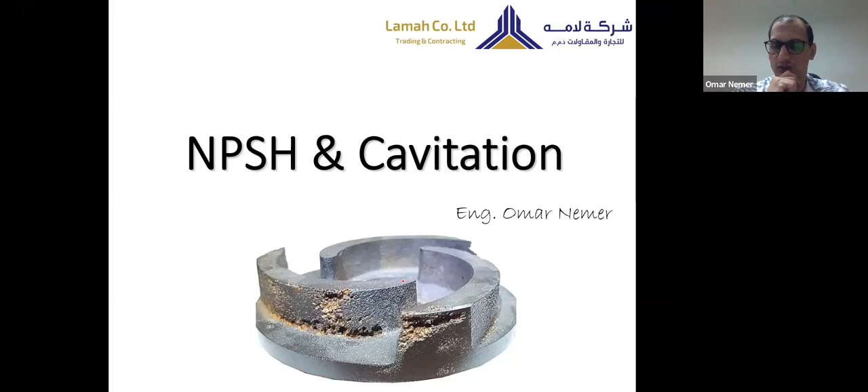Now, like some movies, sometimes, you know, some movies show you a short scene about the end, then they come to the beginning of the story. This is what I will do today.

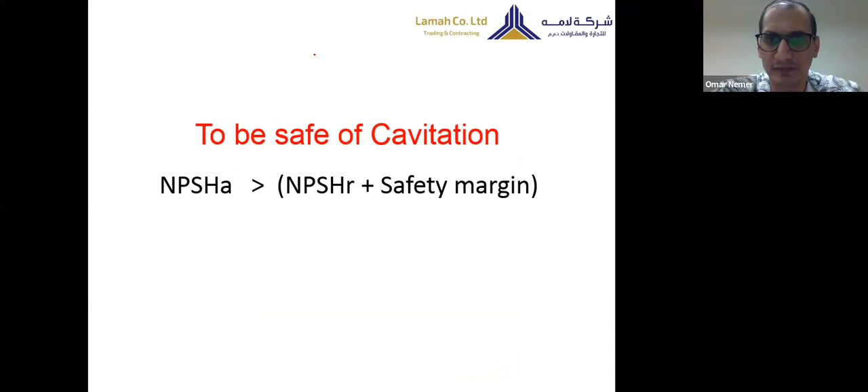Now, the end - we want to reach this conclusion. What is the conclusion? To be safe of cavitation, you need to satisfy this condition: NPSHA, something called NPSHA, has to be bigger than NPSHR with safety margin.

Now, what is cavitation? What is NPSHA? What is NPSHR? What is the safety margin we are looking for? These are 4 questions we will answer. But I'm just telling you the end of the story.

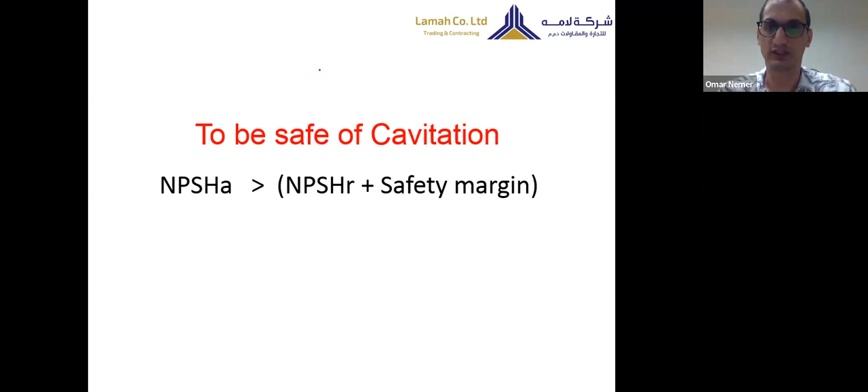Remember, to be safe, to avoid cavitation, to be aware of the risk of cavitation, you need to make sure that the NPSHA in your system is bigger than the NPSHR with safety margin. Okay? So this is what we will end up with. Now, let us go to the beginning of the story.

First, there are 2 things we need to clarify. There is something we call the absolute pressure, and there is another thing which we call the vapor pressure. Why did we select these 2 things specifically to remind ourselves about? Because they are related directly to a suction pump and to the issue of NPSH and cavitation.

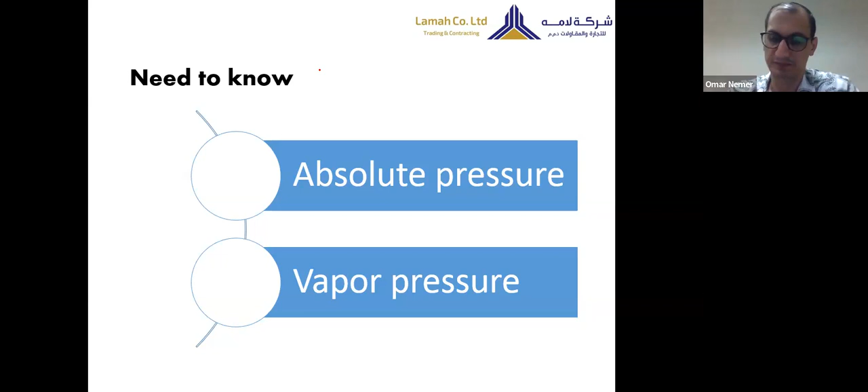Now, absolute pressure. Guys, now you know, when you have a pipeline, and in this pipeline you can have some gauges to read the pressure. This pressure reading, which you can see in your gauge, this is what we call gauge pressure. Gauge pressure, it's the pressure level that is shown on the gauge.

This pressure shows the pressure of the water inside the pump, inside the pipe, excluding the atmospheric pressure - which means the atmospheric pressure is actually not included. It's not shown in the gauge.

So, for example, if you have a tank and there is a pipe, and you have a water level here, up, let us say 10 meters of water. If you put your gauge here, you will notice the gauge shows 1 bar. Why 1 bar pressure? Because the column of water, 10 meters of water, will generate a pressure of 1 bar. So your gauge will show, will give you an indication of 1 bar.

Okay. Now there is a question here. Once we say 1 bar equals to 10 meter head of H2O, how did we know that? How do we come to this?

Simply, you can make a small experiment. If you brought a pipe, closed from one of the endings, let's assume this pipe has a length of 12 meters, and fill it with water. Then bring a plate or whatever and fill it with water. Then flip this pipe and put it inside. What will happen?

You can see the water will go down. Why? By gravity, right? By gravity. The water will fall down, it will fall down up to a certain limit, then the water will stop. Why? Because when the water falls down, it falls down till we reach a pressure of 0, which means we have a vacuum here. At the same time, we know there is atmospheric pressure pushing on the surface of the water.

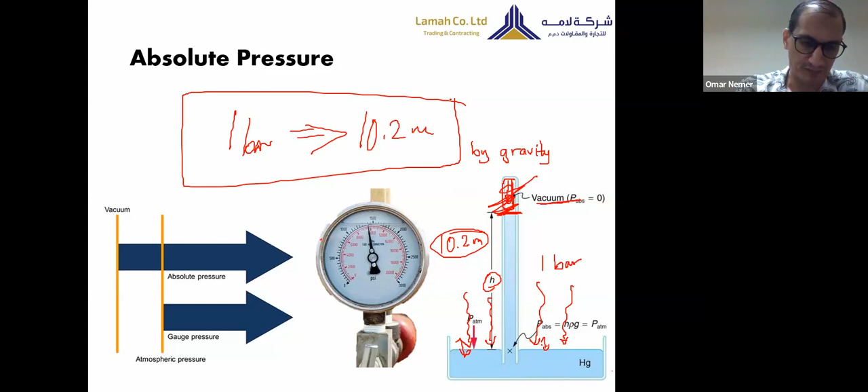So now, as a final conclusion, we have something called absolute pressure. Absolute pressure is the gauge pressure, the reading of the pressure which you can see in the gauge, plus the atmospheric pressure.

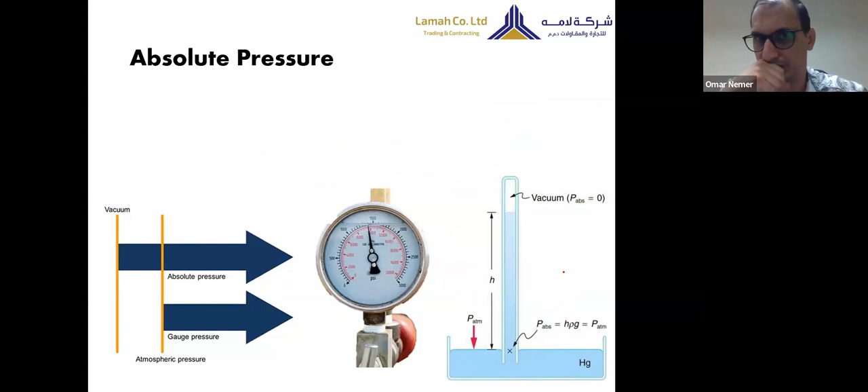Now, let us go to the second term, which is the vapor pressure. Now, vapor pressure has a nice story. Let's start this story to define the temperature, or once we say I have hot water, what does the heat mean?

Now, if you look here in this side, I can see it's just like a sample. Let us assume these circles are the molecules of water, H2O molecules. Because water is a liquid, we know these molecules have some bonds between them. They are not strong enough to make this water solid. At the same time, they are not weak enough for the water to become a vapor. It's in moderate strength. But at the end, there is a link, a bond, ties between these molecules.

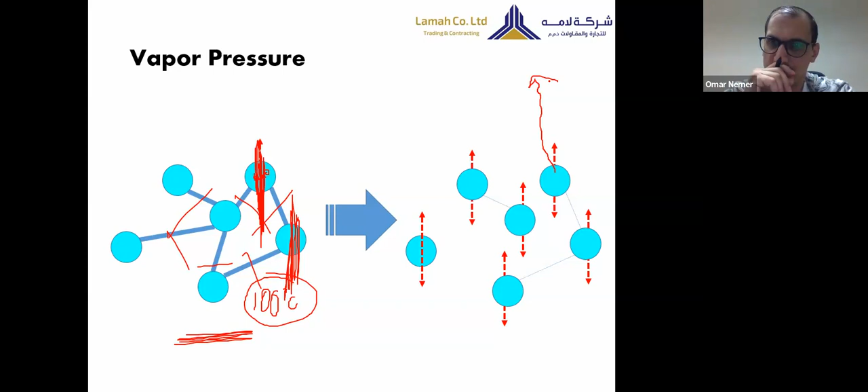Now, let us make another experiment also related to that.

If you have a glass of water, like here, and it's open to the environment, if you come back the next day, maybe you will find no water there. But nobody has drunk it, it was evaporated. And nobody heated it, nobody put a flame to heat the water to be evaporated.

Actually, this heat comes from the surroundings of the glass. The few molecules which can take energy from the surroundings will break their bonds and go to the atmosphere. One by one, most of these molecules from the surface take energy from the environment and disappear. They evaporate. Slowly, after 2 or 3 days, all these molecules will go to the environment.

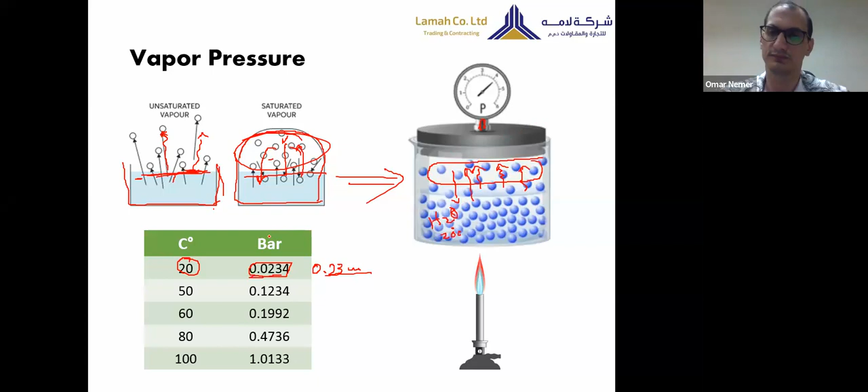Now we brought some flame here and started to heat. We heated, gave heat to the water, heated more, the temperature kept increasing till we reached 50 Celsius. Once we reached 50 Celsius, we maintained this temperature.

After a while, when we look again at the pressure gauge, we see the pressure is fixed at a higher amount. It shows the pressure is 0.1234 bar, which is 1.23 meter head. So the pressure increases. Why? Because we heated the water, so more molecules become evaporated, making higher pressure in this area.

Now we will again increase the flame. We want to heat the water till it reaches 60 Celsius. After a while of fixing this temperature, you will see the pressure becomes 0.19, which is 1.99 meter head.

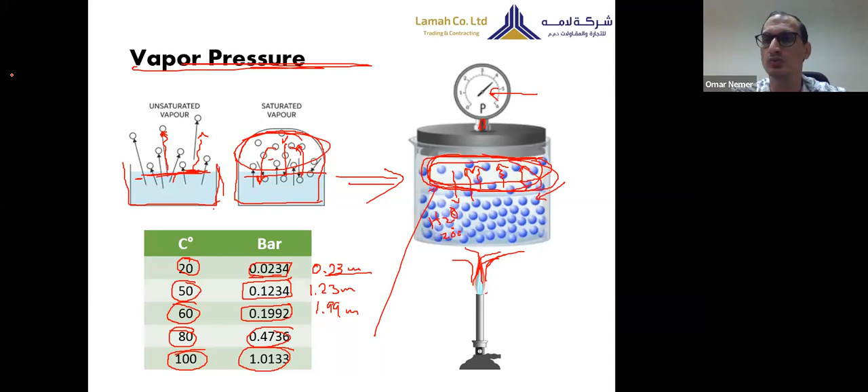Now, the vapor pressure is actually a specific aspect for each liquid. Each liquid has a different vapor pressure, which means if I brought oil and heated it till 60 Celsius, that doesn't mean the pressure will also be like water's 0.19 bar. It will give you something different because this varies from type to type of liquids. But this is what we call the vapor pressure.

Now, we want to understand more about vapor pressure and how we can boil liquids. How can we evaporate liquids? Now, maybe someone will tell me the water boils once the temperature of the water becomes 100 Celsius.

We all know that if we heat the water till it reaches 100 Celsius, it will start to boil and molecules will evaporate. But actually, this is not the root of the case. The root is, gentlemen, the liquid will boil and evaporate once the vapor pressure of the liquid reaches the same level as the pressure on the surface of that liquid.

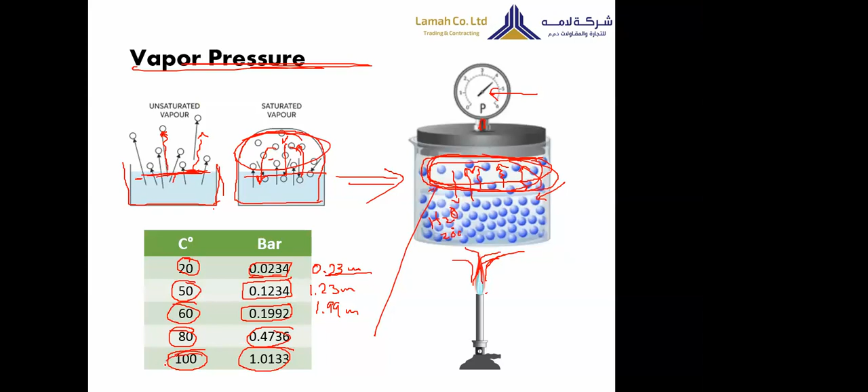For example, once the vapor pressure of the water equals the atmospheric pressure on the surface, then the boil will happen, regardless of the temperature. This is why, when we said if you heat the water till it reaches 100 Celsius, the vapor pressure will be 1 bar - this 1 bar equals 1 bar of the atmospheric pressure. So boiling actually happens when the atmospheric pressure, or the total pressure on top of the surface of the water, equals the vapor pressure of that liquid. In this moment, the boiling and evaporation will happen.

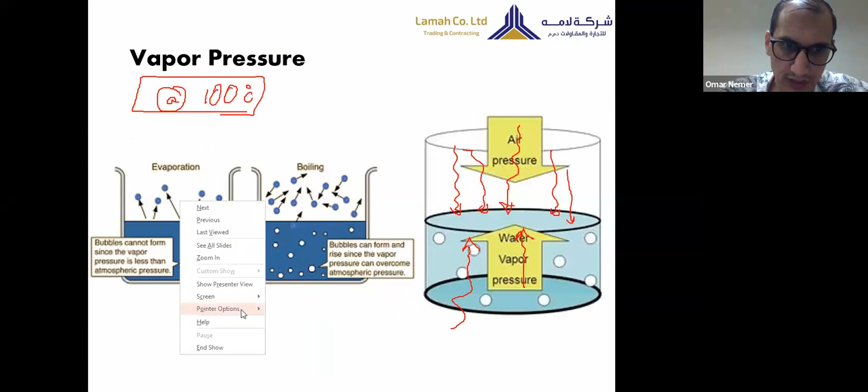Now, somebody will tell me, if this is correct, that means we can evaporate the water under 20 Celsius. And this assumption is correct. How? Let us say if I brought a glass of water and the water is 20 Celsius.

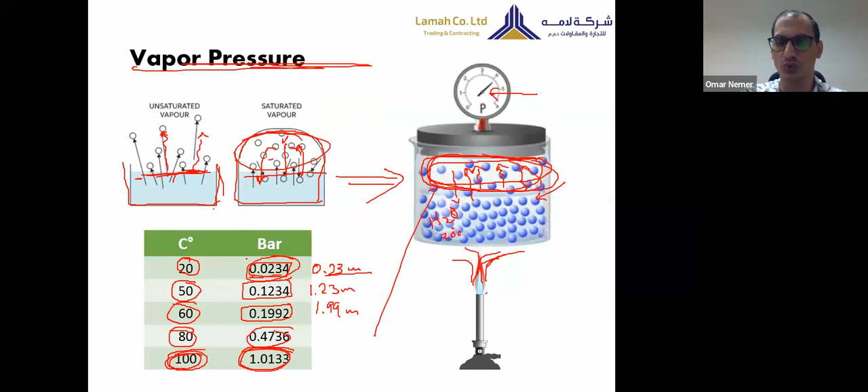It's cold, right? Now, if we closed the surroundings and air is inside, then I will bring some vacuum pump and start to evacuate the air inside. The pressure on top of the water will start to decrease because I'm removing the air. Once the pressure of the air inside that place reaches 0.023 bar, you will see the water is actually boiling and evaporating, even though the water is 20 Celsius.

Why? Because that means you can boil the water in two ways. One way is to heat the water to increase the vapor pressure till it becomes the same level as the pressure at the surface, which is the atmospheric pressure, for example if it's open to the area. And the second way, instead of heating the water, we decrease the pressure on the surface till it reaches the level of vapor pressure. In both ways, you can evaporate the water. If you evaporate the water by adding heat, we call it hot evaporation. But if you evaporate it without temperature, this is what we call cold evaporation.

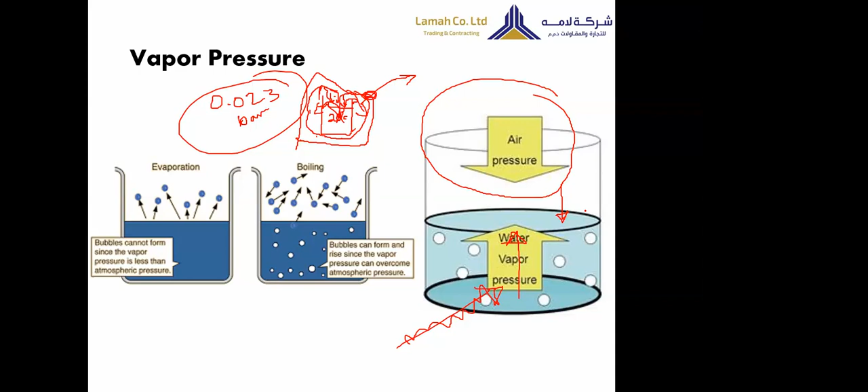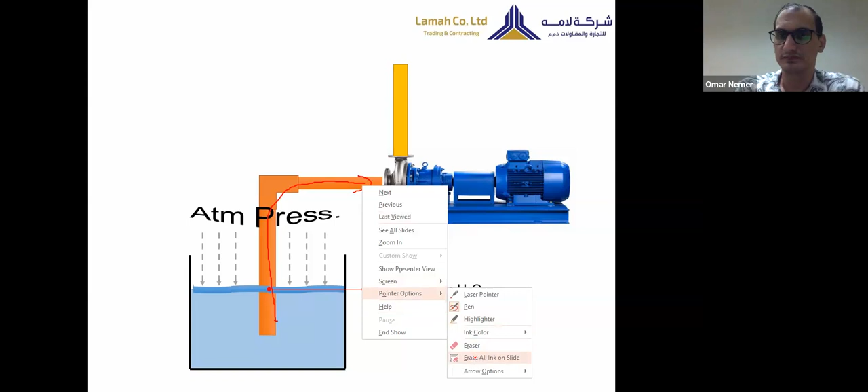Simply, the water - it doesn't have the potential to bring itself from down to top. But who pushes the water to flow from down to top - there has to be some force, and that force comes from the atmospheric pressure.

How? First, to start a pump and let the pump suck water, before operating the pump you have to make something called priming. How we can make priming? First, you have to put a non-return valve or foot valve here. Second, you have to fill the suction line with water. Even the pump itself has to be filled with water.

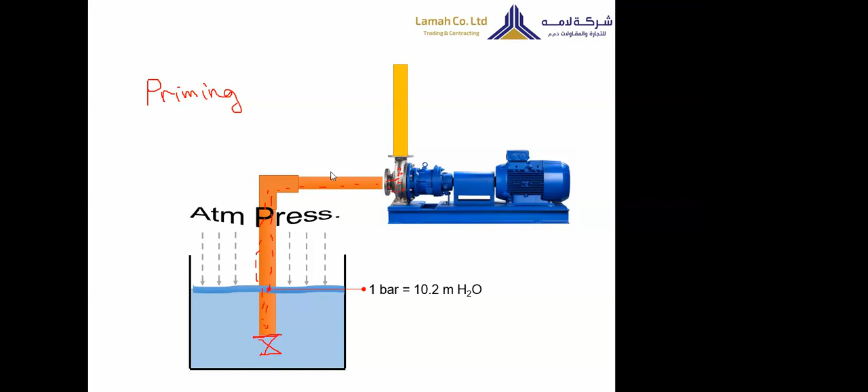If you made this, then we can say you made priming for the pump. So priming is putting this non-return valve, filling water in the suction pipe and the pump itself. This is the priming process. Once you finish the priming process, then you are ready to start up the pump and start pumping.

Now the mechanism - once you start up the pump and it starts to rotate suddenly, very quickly, the impeller rotates quickly. The impeller will push the water inside the pump. It will kick it suddenly to the discharge line.

In this moment, there is an instantaneous vacuum that will happen. There will be no vacuum exactly clear, but instantaneous vacuum will happen inside the pump. So the pressure inside the pump becomes zero instantaneously. This is inside the pump.

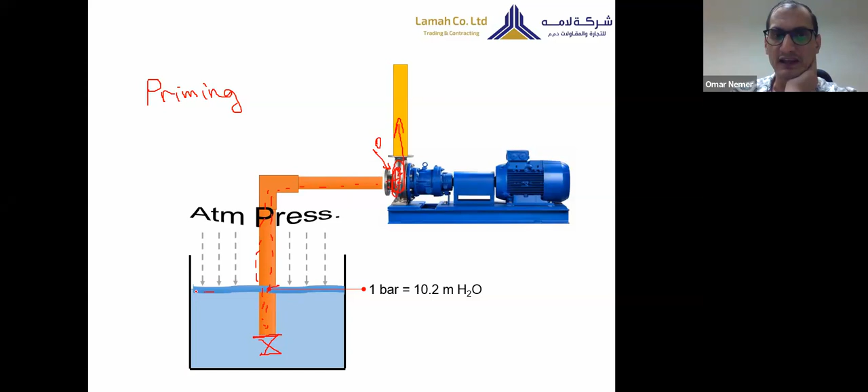But for the water here, at the surface of the water in the tank, we have atmospheric pressure. This atmospheric pressure equals 1 bar, which is 10.2 meter head. So for the water here, there is absolute pressure. Why do we say absolute? Because we included the atmospheric pressure. So the absolute pressure here is 10.2 meter, right?

But inside the pump, the absolute pressure instantaneously is zero. So we have delta P, a differential pressure. We have 10 meter head here from the atmospheric pressure, and zero inside the pump, so we have delta P. This delta P is the force which makes the water continue flowing from down to the top to reach the pump.

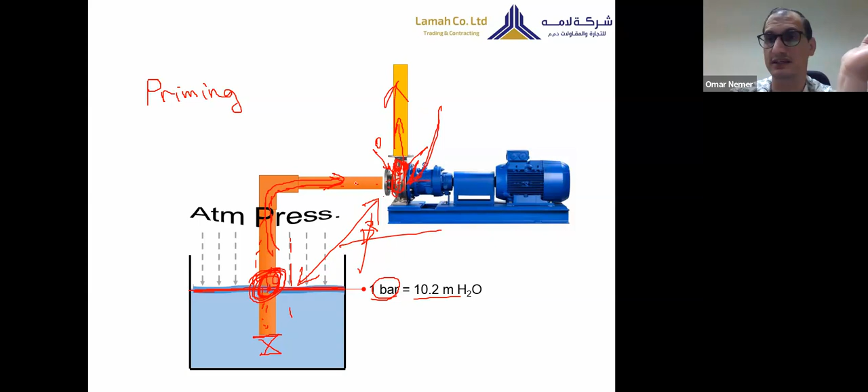So now, gentlemen, if you made some opening in the casing, immediately you will see the pump stop pumping. It will work, but there is no water coming inside. Why? Because atmospheric pressure will come in here, so this delta P will disappear. There is 10 meter head here and 10 meter head there, so we have no differential, so the pump will stop sucking. So this is how the pump makes suction of water, especially from down to top.

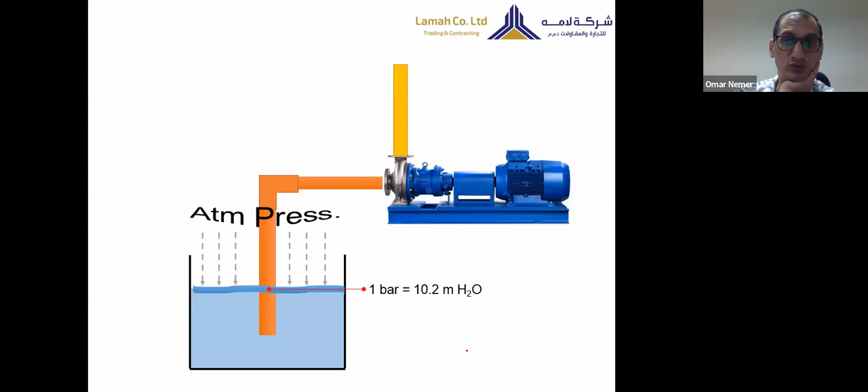Now, these three things which we said, absolute pressure, vapor pressure, and how the pump is sucking water from down to top, if we understand these, we can mix them in our minds and conclude many things to understand better and to know what is the NPSH. For this process, please follow with me answering a couple of questions.

Question number one. As you can see here, we have an example of a pump which will suck water from down below. This example says the elevation between the water surface and the pump level is 3 meters. Also, assume that the friction or head loss caused by friction inside the suction line is equal to 1.2 meter head.

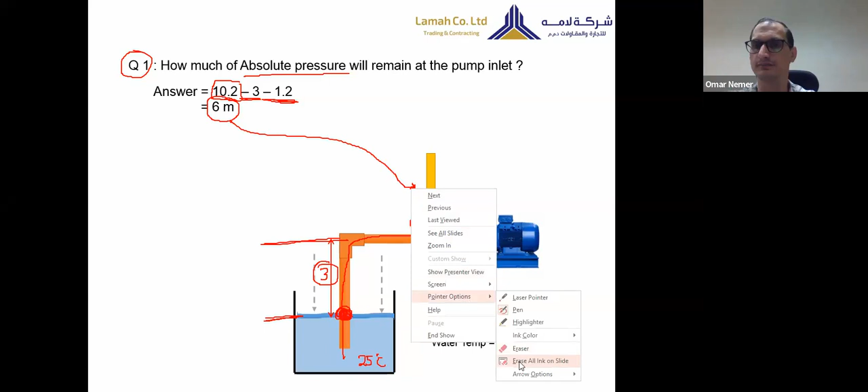Now, question number two.

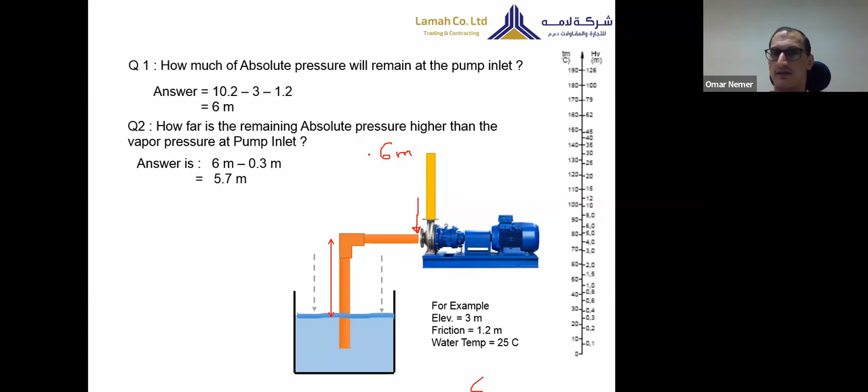Question number 2: how far is the remaining absolute pressure higher than the vapor pressure at the pump inlet? From question number 1, we knew the absolute pressure at the pump inlet is 6 meters. Now we want to know the difference between the remaining absolute pressure at the pump inlet and the vapor pressure level. Why do we care about this difference?

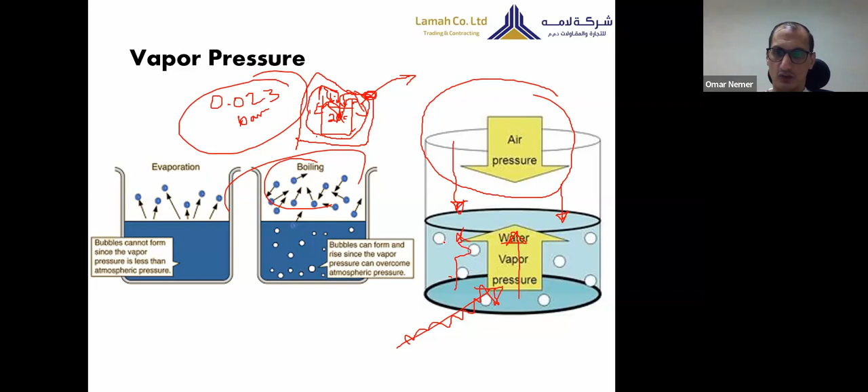Remember when we discussed boiling and evaporation? We said evaporation and boiling, generating bubbles, will happen if the pressure on the water surface equals the vapor pressure. We are afraid of this scenario, when the absolute pressure on the water equals the vapor pressure, because the water will start to boil and create bubbles. We don't want this. If it happens, it's related to a problem called cavitation, which we will describe after a while.

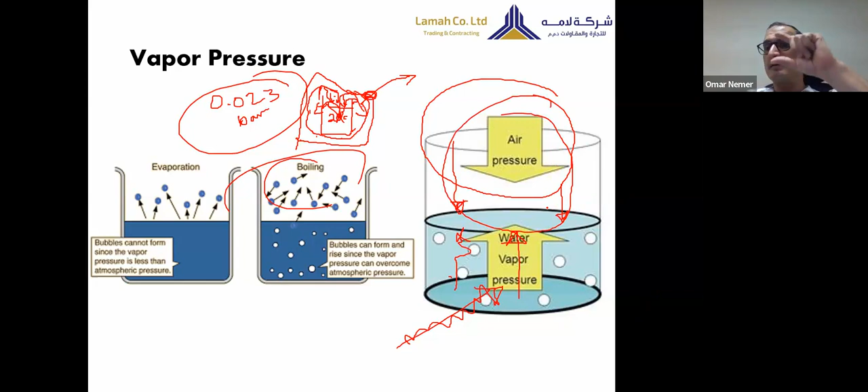So we don't want this to happen. We want to make sure the pressure above the water surface is always higher than the vapor pressure by some extent. This is why I'm asking question number 2. We want to know this remaining absolute pressure at the pump inlet, and how much higher it is than the vapor pressure, because I need this pressure to be higher than vapor pressure. But how much higher does it have to be? This is what I'm asking you.

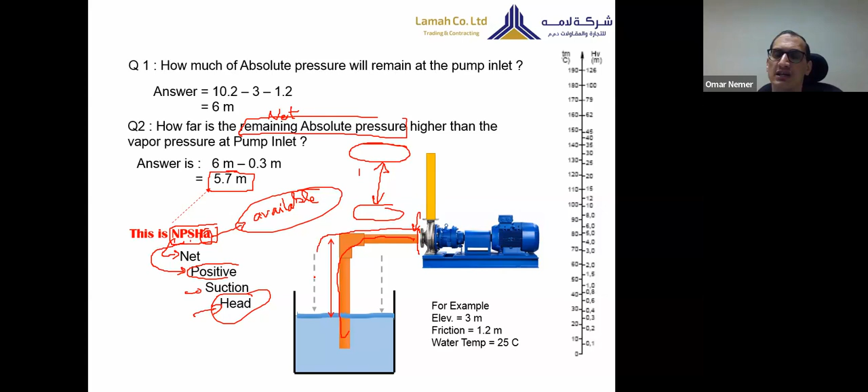This small A comes from the word available. Why? Because as you can see, this NPSH which we calculated is actually related to the suction line, not to the pump. This is something which is available in front of the pump. The pump didn't make it, it's available for the pump, but the pump didn't create it. This is the NPSHA: the net positive suction head that is available in the system for the pump.

And this NPSHA has to be calculated, using this equation. Actually, this equation is the conclusion of the previous questions we made. Remember question number 1, we asked about the remaining absolute pressure at pump inlet. Then we asked how far it is from the vapor pressure. If we combine these two questions, question number 1 and number 2, we get one equation, which is here.

NPSHA equals the atmospheric pressure, which is 10.2 meters, plus other head sources. Sometimes there could be other head sources. In this example, or in any place where we suck from down to top, when I have suction lift, here I have no other sources of head, usually it's only the atmospheric pressure. But suppose if I put here a submersible pump, and I wanted to calculate the NPSHA for the pump on top.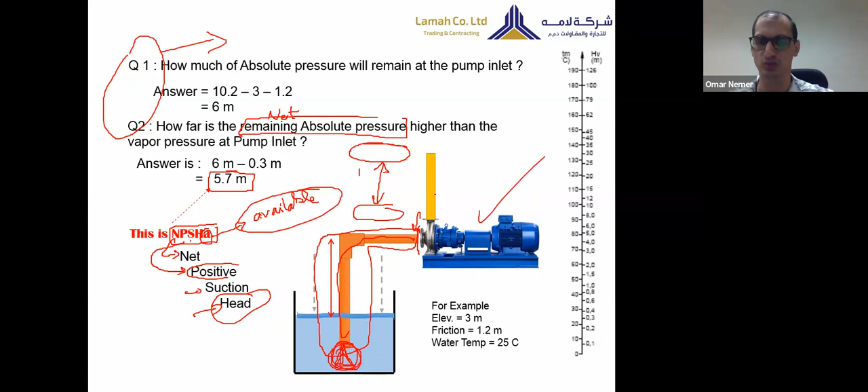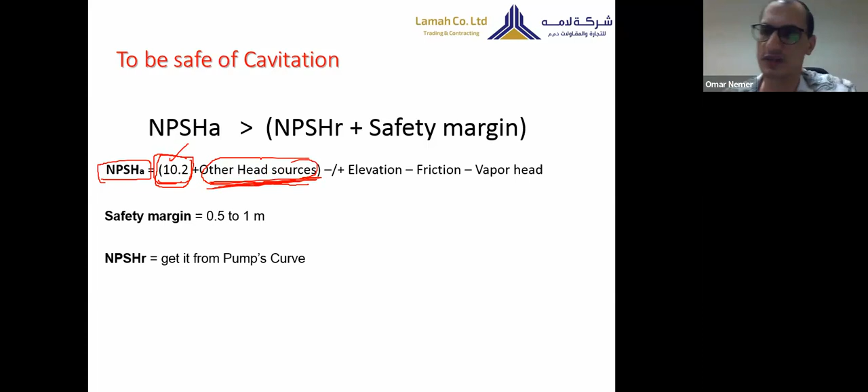In this way, I have to say I have 10.2 meter head atmospheric plus the head which is generated by the submersible pump. This is what I mean by other head sources. Any head source has to be added to the atmospheric pressure. So again, back to this equation: NPSHA is the atmospheric pressure plus other head sources.

Minus the elevation if it's negative suction. If you have negative suction, then you have to subtract the elevation. But if you have positive suction, then you have to add the elevation.

Negative suction, guys, if I have tank and pump on the top, this is negative suction. The elevation, it's here. So in such case, I will deduct the amount of the elevation from the atmospheric pressure.

But if I have positive suction like this, as you can see, the pump is next to the tank. In this situation, this elevation, which is the water level, because the water level is higher than the pump, this elevation will be added to the atmospheric pressure.

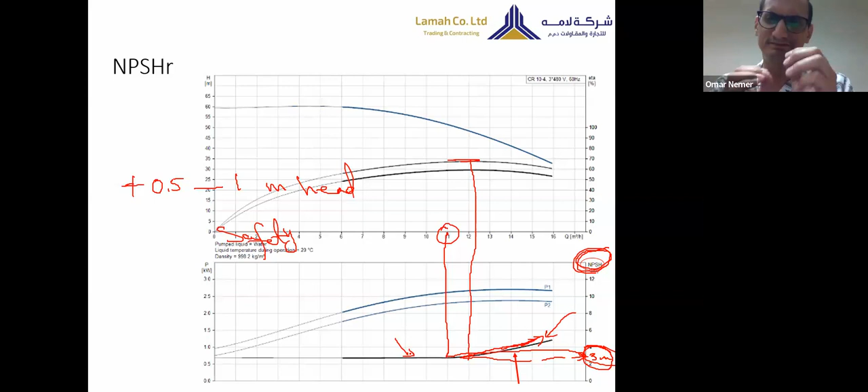Now, all pump manufacturers are telling us, all of them agree, that this value of the NPSH which you get from the catalog, please add half to up to 1 meter head as a safety margin. Why? Because this curve is general in the catalog. The manufacturer is producing thousands and thousands of models, thousands of quantities of the same model. It's impossible they all have the same curve, because at the end during production there is some very minor differences, difference in roughness, you know, they cannot be 100% the same.

Also, the instruments that we are using have some, you know, accuracy level. This is why they are telling us, please, the NPSHR which we will get from our curves, put 0.5 to up to 1 meter head as a safety margin.

So now you know the NPSHR, how to find it, and this safety margin, which we said 0.5 to 1 meter head as a safety margin. So now you know NPSHA, and NPSHR with a safety margin. So I can tell you, if your NPSHA is higher than NPSHR including the safety margin, then you are safe. You are away from the risk of cavitation. So now you know what is the NPSHA, what is the NPSHR.

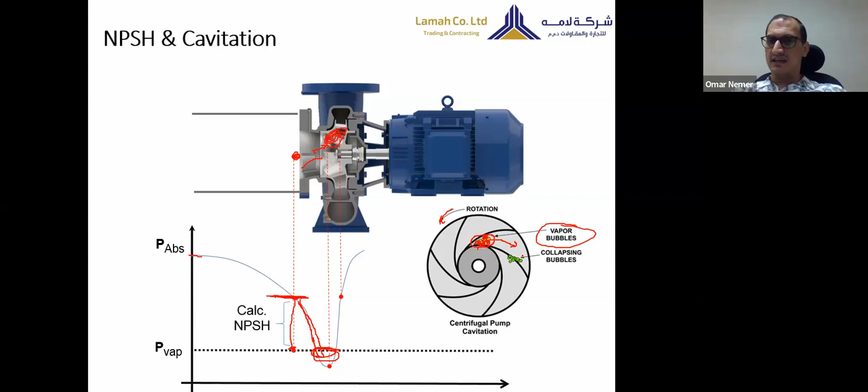These vapor bubbles will be generated here. But these bubbles will not stay in the same place because the impeller is rotating, so by centrifugal force this bubble will continue moving. But once it reaches this place, the pressure of the water will start to increase by the effect of the impeller. So once the pressure increases again, this vapor bubble will disappear suddenly.

Why will they disappear? Again, these vapor bubbles are not air, they are vapor bubbles formed because the absolute pressure comes down to the level of the vapor pressure. But once the pressure on the water goes back to a higher level, the source of presence for these bubbles is gone. These bubbles will disappear, once they disappear they will leave

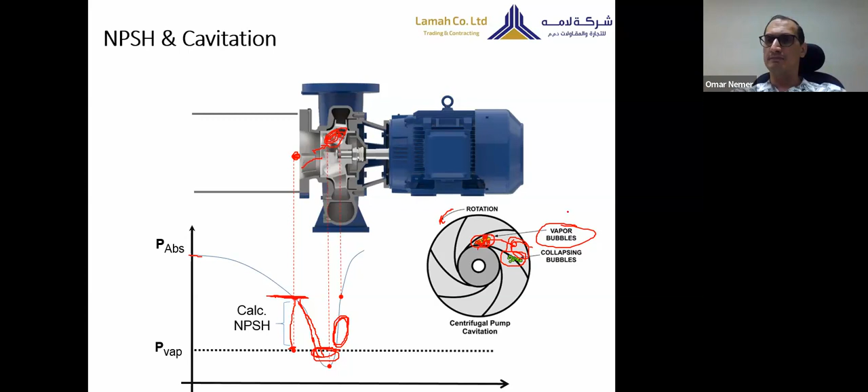vacuum bubbles. They disappear and the vacuum will be in their place. But this vacuum will disappear immediately. But how? This is the problem. This is the vapor bubble, as you can see, this is the vapor bubble. This vapor bubble is surrounded by water.

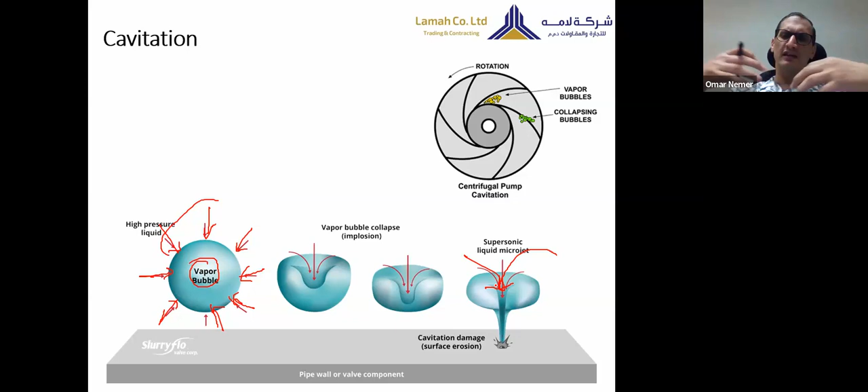But once the absolute pressure of this water goes back high, as we said, this bubble will disappear. But how will it disappear? It will collapse, quickly collapse. So the surrounding water will go inside this bubble to occupy the gap left by this vapor bubble. The water will flow quickly, very fast, to fill this gap. The speed of this water which wants to fill this gap equals the speed of sound in water. The speed of sound.

This is just to imagine how fast it is. It's very fast. And once it goes to fill this gap very fast, this water will hit to each other. You know, it's like this. The water will come from all directions and will meet in the middle. They will hit.

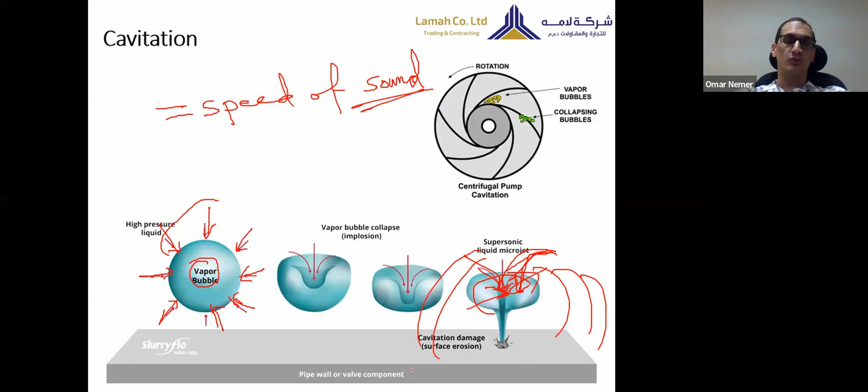This hitting of the water, which is at the speed of sound, will generate two things. They will generate a wave of pressure, a very tough wave of pressure, and this wave will be reflected to other parts of the pump, plus they will generate a jet of water flowing so fast, at the speed of sound, and they will hit the surface of the impeller here.

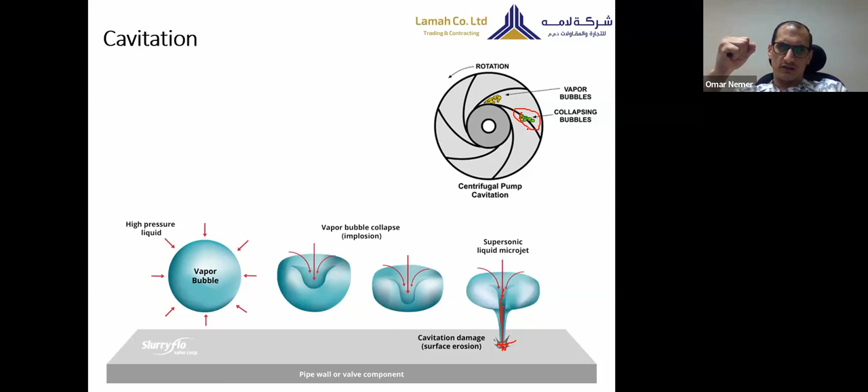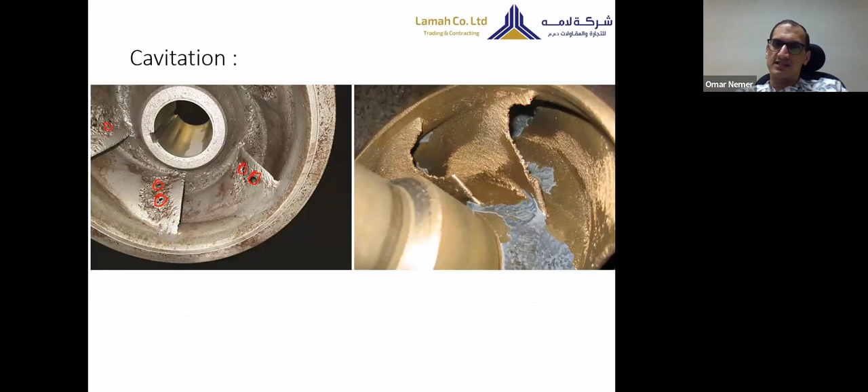It's a very tough punch. It's very tough. If you see these pictures, you can imagine how tough this water is. It's like a hammer, very tough. You can see these metallic impellers. See these holes in the impeller vanes? These are holes, and then they become very clear cracks. Look at the loss of material for this impeller. It's very dramatic.

And by the way, for this to happen, it will not take a long time. I mean, this is not an impeller after 5 years. It depends on how long this cavitation continues, but if it's continuous, this could happen within a few weeks or months. It's not a long time, gentlemen, because some studies I heard are estimating the strength of this water jet around 10,000 bar.

This is why when cavitation happens in a pump, if you come closer to it, you will hear some very strong sounds. It's similar to stones hitting steel. You will think for a while that there are some small stones inside the pump and they are hitting the pump. But once you open the pump, there is nothing inside. There are absolutely no stones.

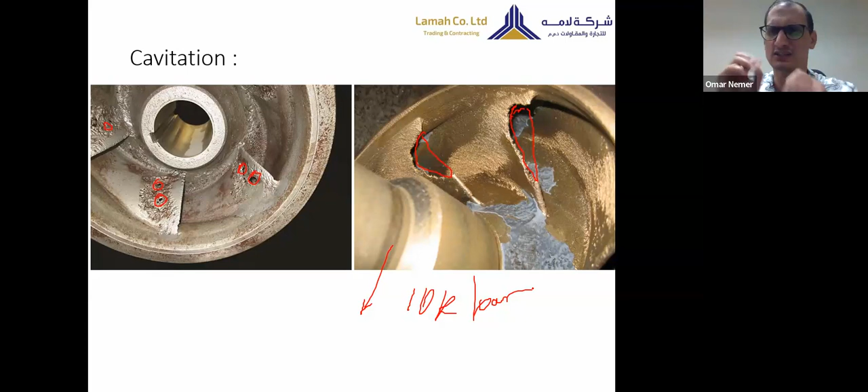Now you can understand what cavitation is and why we are afraid of cavitation, and why we need, during pump selection, to make these calculations of NPSH to make sure we will not face this cavitation.

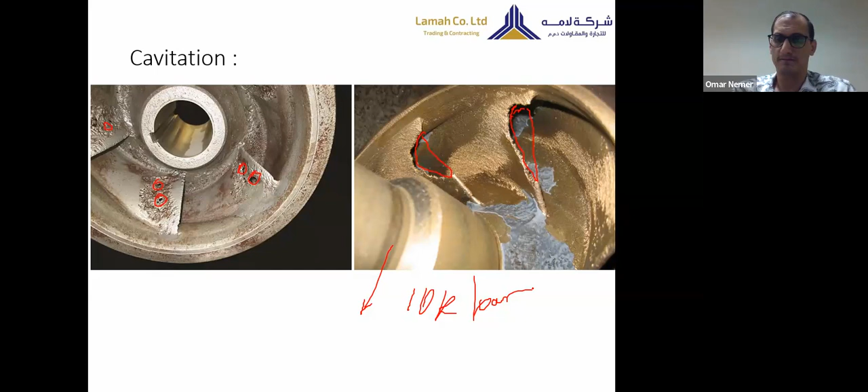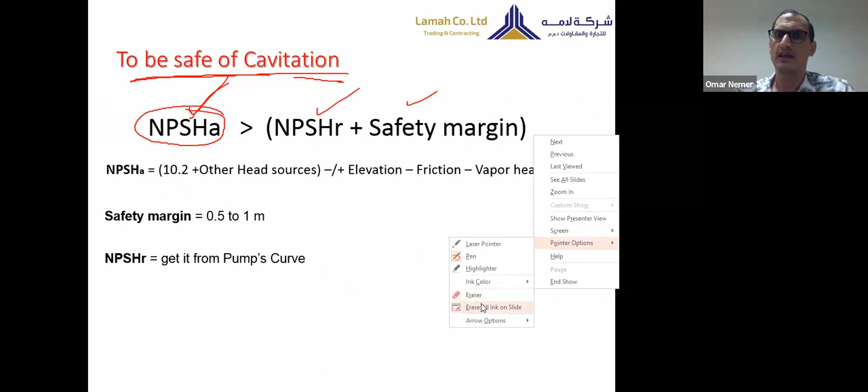Now, if cavitation happens, let us come to a practical part. If I saw a pump facing cavitation, how can I solve this problem? Simply look at this slide. Any strategy you will choose - there are many ways to solve your cavitation issue.

Any strategy that leads to increasing the NPSHA is helping you to avoid cavitation. Any strategy that decreases the NPSHR is helpful to avoid the cavitation. So, how can I increase the NPSHA?

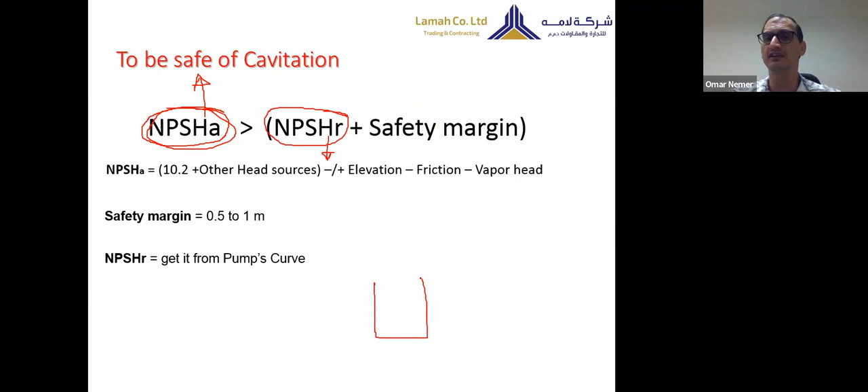You can increase NPSHA, for example, if you have negative suction, try to decrease this elevation, which means make the elevation between the pump and the water surface lower. Because lowering or decreasing the elevation means higher NPSHA, right?

Also, look to the sources of friction. Try to minimize the friction. Sometimes this friction becomes high because of a strainer at the suction side. There is a strainer, and this strainer has a lot of dirt stuck in it, and people ignore it - they didn't clean the strainer. So once the strainer is close to being clogged, it generates very high friction. This friction decreases the NPSHA. So the solution is, please clean the strainer.

Sometimes, if the pipe is 2 inches, maybe you can make it 2.5 or 3 inches. This will decrease the friction. This is different from case to case. Each case, you want to see what is the major factor that is lowering the NPSHA, so you will think how to increase it.

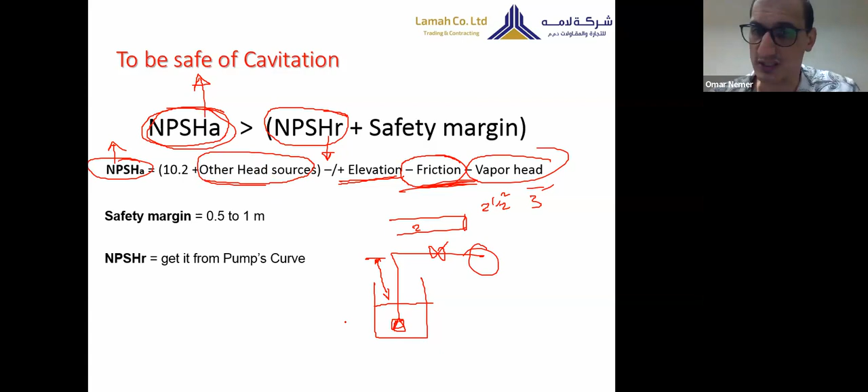Sometimes in some industrial applications, we try to cool the water so the vapor head comes lower. This is also a possibility. Sometimes none of these things could be helpful, so then you can think about how to add other head sources that can support the atmospheric pressure. Like what? Like putting a pump here at the inlet of the suction. This is also a solution.

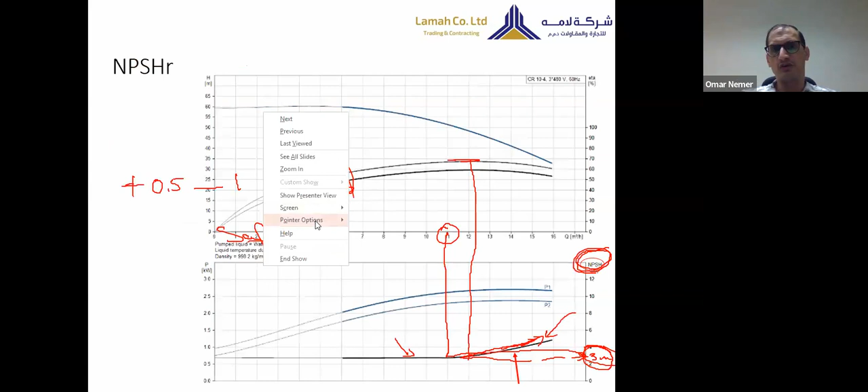Now, maybe someone will ask how I can decrease the NPSHR, for the same pump. For example, if your pump is working here, this is suction, this is pump, this is discharge, and there is a valve here. If your pump is working here and you noticed cavitation, one of the solutions is to make throttling by closing partially the valve at the discharge side, so the flow rate will go less. So you will decrease the flow rate. Once you decrease the flow rate, you can see the NPSHR goes down.

But if you have the chance to change the pump, you can look for another pump that has lower NPSHR. Or sometimes, instead of having one big pump, I can use two smaller pumps in parallel, because the smaller pumps will have lower NPSHR than the big one. This is also a solution.

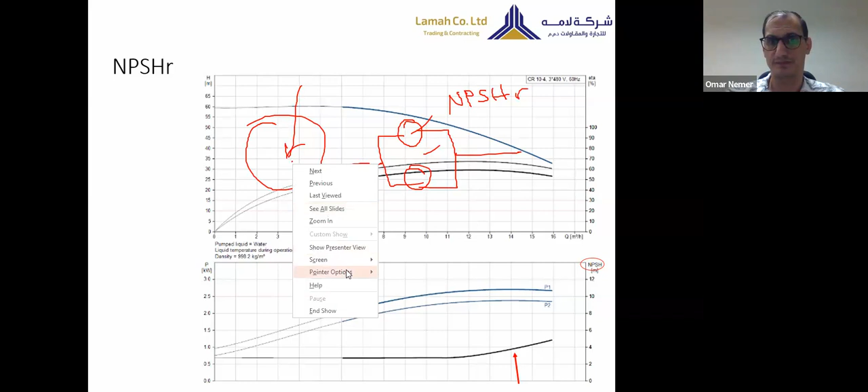Using VFD, because we know if we decrease the speed of the pump, the head will be decreased, the flow will be decreased. Also, the NPSHR will be decreased if you decrease the speed of the pump. How much will it be decreased? By the square of the percentage of increase or decrease in speed.

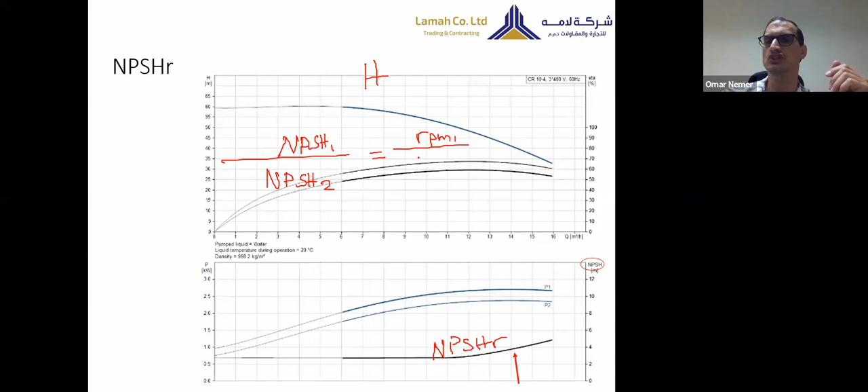Which means NPSHR, the initial one, over the NPSHR, the modified one, the changed one, equals to the RPM, the initial, over the RPM which you will get after using the VFD, squared. So VFD can help you by lowering the speed to eliminate or finish this problem of cavitation.

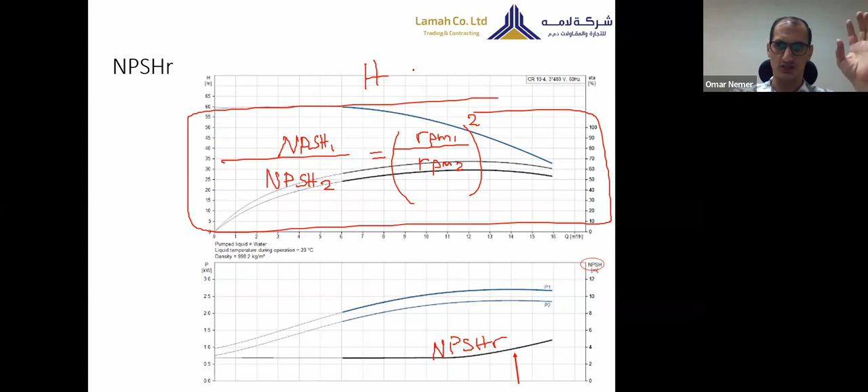Now, there is one question. If I have a closed loop, this is the pump, and the water is just circulating, and the water fills the piping completely. In this situation, there is no atmospheric pressure, right? There is no atmospheric pressure.

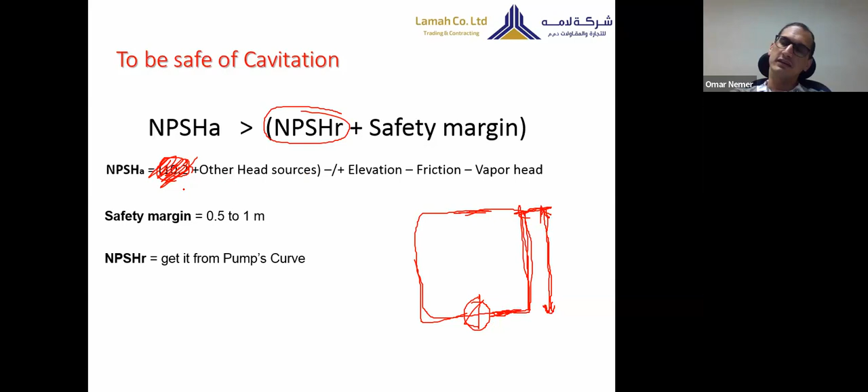But what I have is the pressure of the water column. So this elevation, this water column, will generate the pressure instead of the atmospheric pressure. So I have other head sources, which is the water column, and which is the same as elevation, which means here the elevation and the head sources are together, and they are the water column.

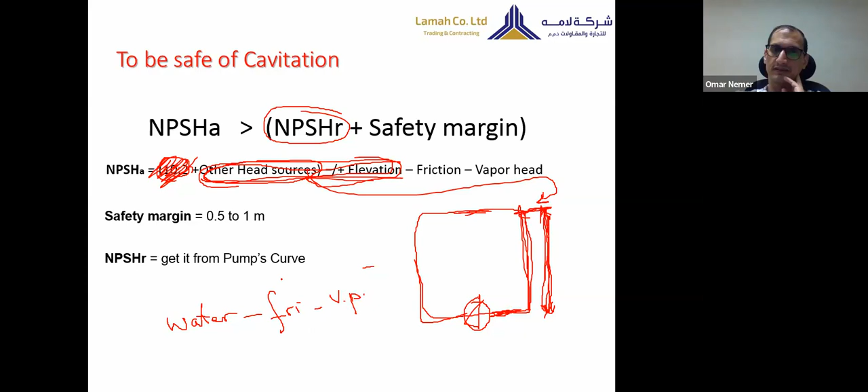So you will say the water column, or the static pressure created by the water column, minus the friction, minus the vapor head. This is how you can calculate the NPSHA in a closed system.

If I added a pressurization unit to make pressurization to the system, then you will say the pressure of this pressurization unit, plus the water column, minus the friction loss, minus the vapor pressure. This is how you will calculate the NPSHA for a closed system.